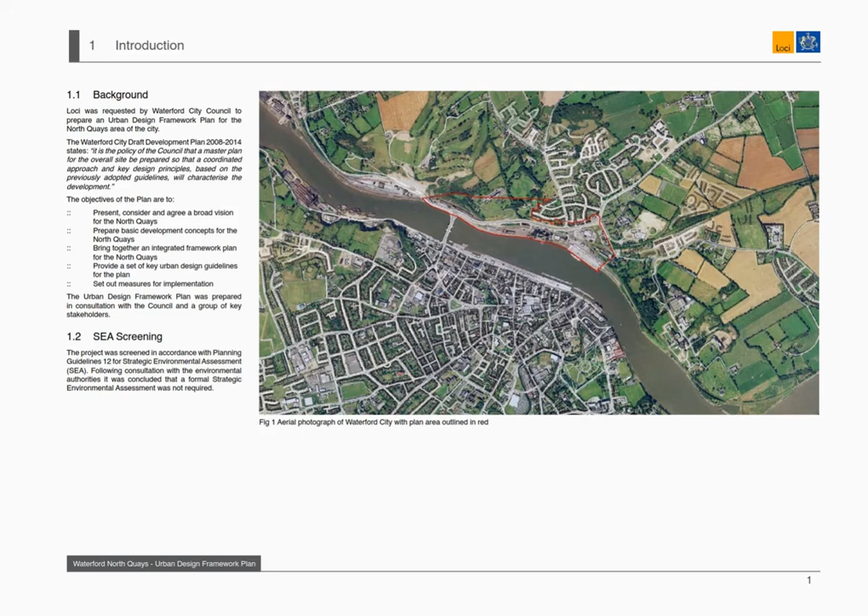1.2 Strategic Environmental Assessment, SEA, Screening. The project was screened in accordance with planning guidelines for Strategic Environmental Assessment. Following consultation with the environmental authorities, it was concluded that a formal Strategic Environmental Assessment was not required.

2. Vision and Principles. 2.1 Vision. The vision for the area is to create a sustainable, modern, and innovative extension of the city centre with the opportunity to connect the city centre with Ferrybank, where a rich quality of life and unique sense of place can be experienced by residents, workers and visitors alike.

2.2 Principles. 1. To create a strong and complementary extension of the city centre. 2. To provide a rich and diverse mix of uses with no single dominant function, where a balance of living, working, retail and recreation can be achieved. 3. To create a distinctive quarter of real character and sense of place and to provide an adaptable and coherent urban form and structure.

4. To strengthen the character and identity of Ferrybank and to improve its connectivity to North Quays and city centre. 5. To foster attachment to place, through quality and richness of experience. 6. To create a framework of public and civic spaces of character and visual quality. 7. To create a waterfront that is a focus for complementary land and water-based activities and recreation. 8. To provide for sustainable patterns of movement and access with priority for pedestrians, cyclists and public transport. 9. To minimize the environmental footprint of the North Quays.

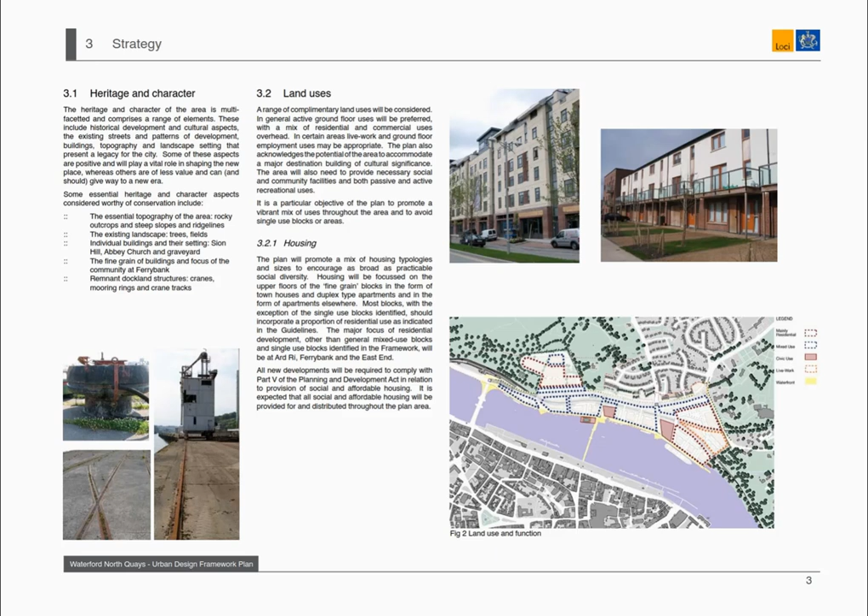All new developments will be required to comply with Part 5 of the Planning and Development Act in relation to provision of social and affordable housing. It is expected that all social and affordable housing will be provided for and distributed throughout the plan area.

3.2.2 Employment. Local employment provides the basis for healthy and sustainable communities. The development of the North Quays will provide for significant local employment opportunities, initially in construction activities, but more importantly in local services, retail, office-based, and a range of local businesses.

Live work and small unit employment uses will be focused on Ferrybank's East End. Significant office-based employment is provided for, within the robust mix of the area. The central location, and access to public transport and city centre services and attractions, provides a strong incentive for these types of uses.

3.2.3 Community support. Community facilities will be provided as a planning gain, and through development contribution schemes. Core elements of the framework strategy for community support will be the provision of a major cultural venue, childcare facilities in accordance with the requirements of the childcare facilities guidelines for planning authorities.

It is envisaged that one significant childcare facility will be provided at Ard Ri, Ferrybank and at the East End, in support of the residential development there. The location and detail of these facilities will be agreed with the planning authority when preparing development proposals.

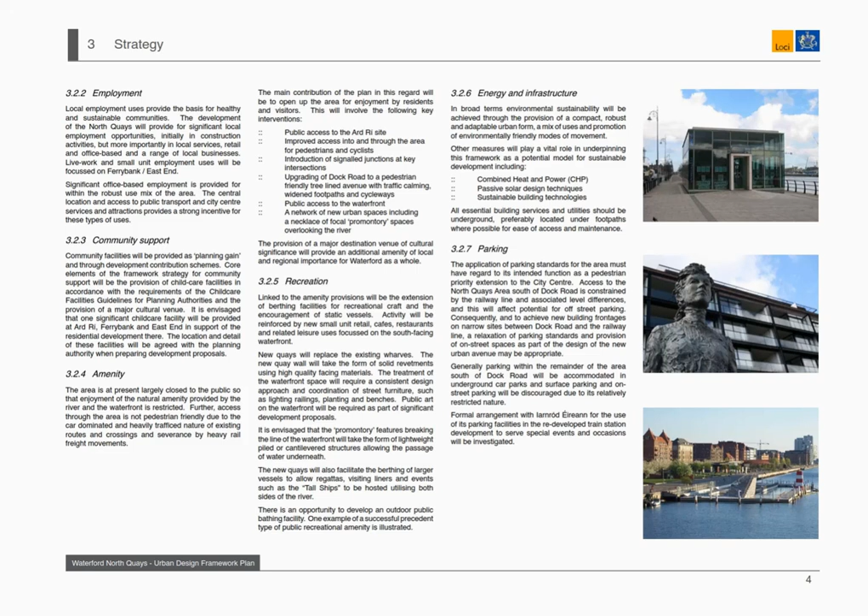3.3 Urban and block structure. The urban structure for the North Quays is informed by the local topography, landscape and the water body. The principal aspects of the urban structure are the connections to surrounding areas, such as the waterfront and streets connecting to Dock Road and beyond, and high levels of permeability within the area.

The Dock Road provides an opportunity for a new urban avenue and an important artery for the city. The North Quays will need to relate to this artery in terms of access, activities and urban form. The main access points from the Dock Road to the area will provide a high degree of physical and visual accessibility for residents, workers and visitors.

The connections between Ferrybank and the new waterfront will be prioritized. The waterfront will be a major route providing access to the quayside and the water and connecting with future strategic and amenity walks following the course of the river.

The expansion of the city centre to the North Quays will be achieved through the construction of the new cycle and pedestrian-only bridge spanning the river. This bridge will enable the expansion of the main street and space structure of the city centre by providing new connections to the North Quays, Ferrybank and the larger environs.

The structure will provide for new linkages to public transport. The railway station will be incorporated into the urban structure, significantly improving local access and larger accessibility. The size, shape and nature of the area dictates that a robust block structure is necessary. This structure provides a range and diversity of robust block types and sizes and maximizes opportunities for access.

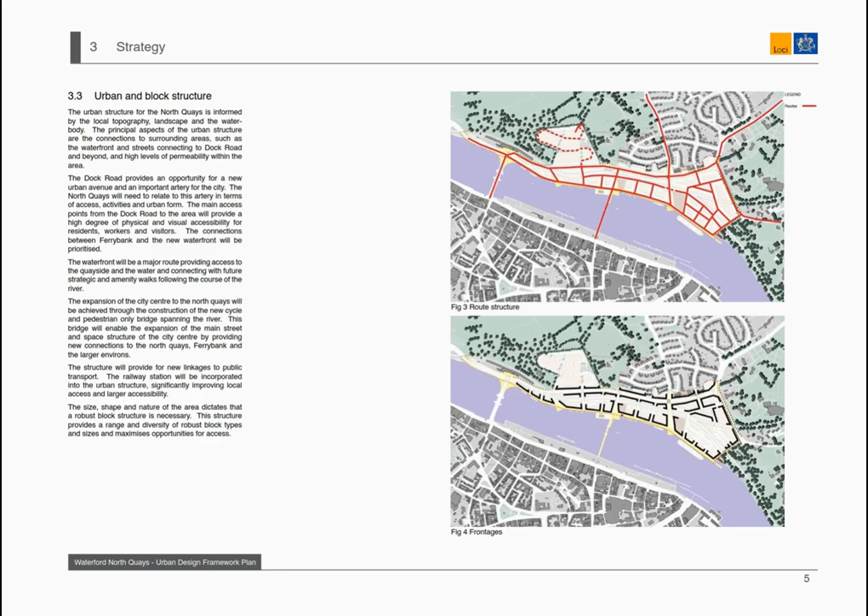3.4 Urban grain. The longer-term success of the area will be dependent on achieving a high degree of physical adaptability and diversity of use. The most important measure of adaptability is urban grain. A fine grain of development is recognized by best practice elsewhere as a key component in existing, successful areas, and is considered necessary to support a diversity of uses and physical typologies at different scales.

The plan provides for a permeable and connected network of streets and spaces that gives rise to a range of block sizes and types. The perimeter block is the preferred and tested building typology, and it is highly appropriate to the North Quays. The perimeter block distinguishes between public and private spaces, allowing public space to be actively fronted and passively policed, while also allowing flexibility in architectural and design solutions.

In restricted areas such as at Ard Ri, the steeply sloping topography will have a particular influence on both the urban structure and the design and layout of constituent blocks.

Development of this site will need to be carefully considered to avoid ambiguity between the fronts and backs of buildings and access constraints, while acknowledging the potential for views and sun aspect afforded by stepping down the site. To provide for a fine grain of development in key areas, the plan requires the subdivision of certain blocks into smaller parcels comprising different buildings of broad typology with different design approaches.

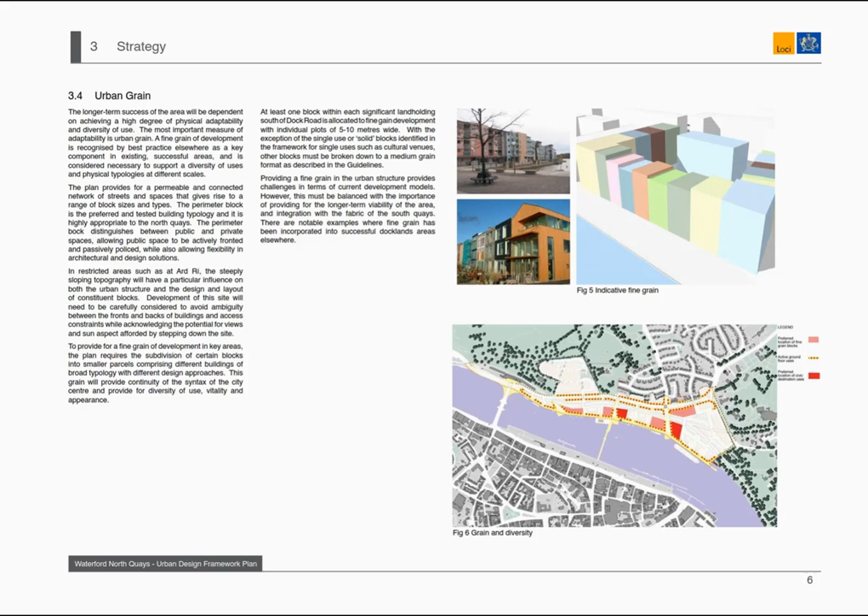3.5 Urban Space and Landscape. The plan provides for the linking of the existing civic spaces of the city and a new sequence and variety of spaces. The new spaces are in essence a necklace of spaces and promontories connected by the waterfront, ferrybank and surrounding areas. The significant urban spaces are:

1. The train station forecourt and promontory. 2. The train station underpass and promontory. 3. The bridge landing and promontory. 4. The main civic space and promontory connecting ferrybank and the waterfront. 5. The eastern beacon and connection to the riverfront.

The plan envisages the development of the urban village at Ferrybank, and this will require a careful consideration of its public domain and urban space. There is an opportunity to provide a vantage point or promontory park overlooking the city from the landscaped ridge at and above the Ard Ri site.

Connections to the wider landscape structure, in particular Ferrybank and its backdrop of ridges and the riverfront landscape, is an important feature of the plan. The new landscape structure acknowledges the potential and importance of the landscape outside of the plan area in visual and amenity terms. The relationship and interface between the frontage, ground floor uses, the waterfront and water-based activities, will be crucial to the function and success of these spaces.

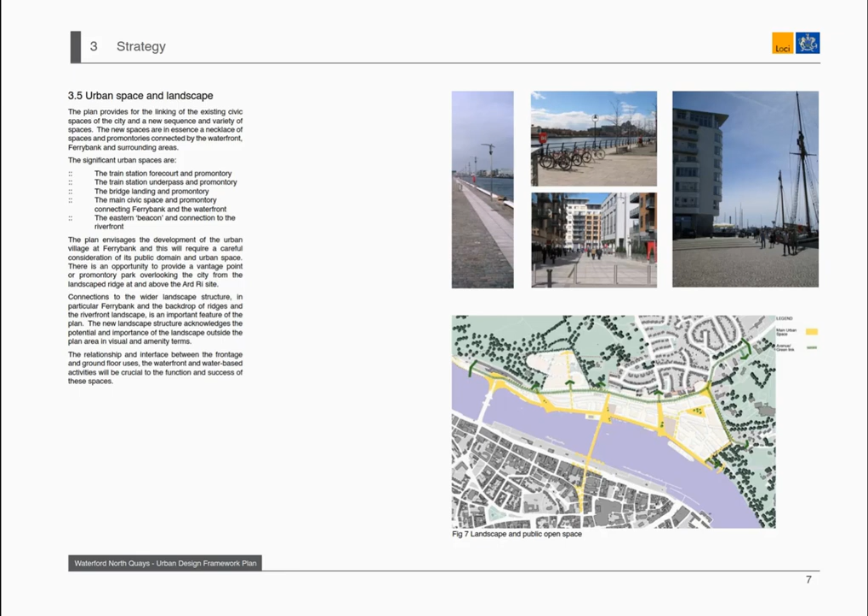3.6 Movement and Access. The movement framework provides for a balance in the available and potential modes of transport. At the strategic level, the plan takes advantage of existing and planned public transport and road and street infrastructure. Direct connections to the train station will be provided.

The street structure will allow direct access to planned, quality bus services on Dock Road. The new bridge will provide easy access to the existing bus station. The framework prioritizes pedestrian movement and access, and integrates local and strategic cycle routes.

The waterfront and several streets will be pedestrian priority or pedestrian only in nature. The bridge will provide a vital link between the pedestrian and cycle networks of the north and south sides of the river. Additional pedestrian bridges from Dock Road to the North Quays over the railway line will be provided.

Options for general vehicular access to the North Quays are limited. Excessive road engineering and grade separation solutions will not be acceptable. Limited road bridge access is currently available from Dock Road. This will need to be improved and upgraded to serve future development.

The substandard level crossing at Ferrybank will not be adequate to serve development, and a new road bridge will be required at or near this location.

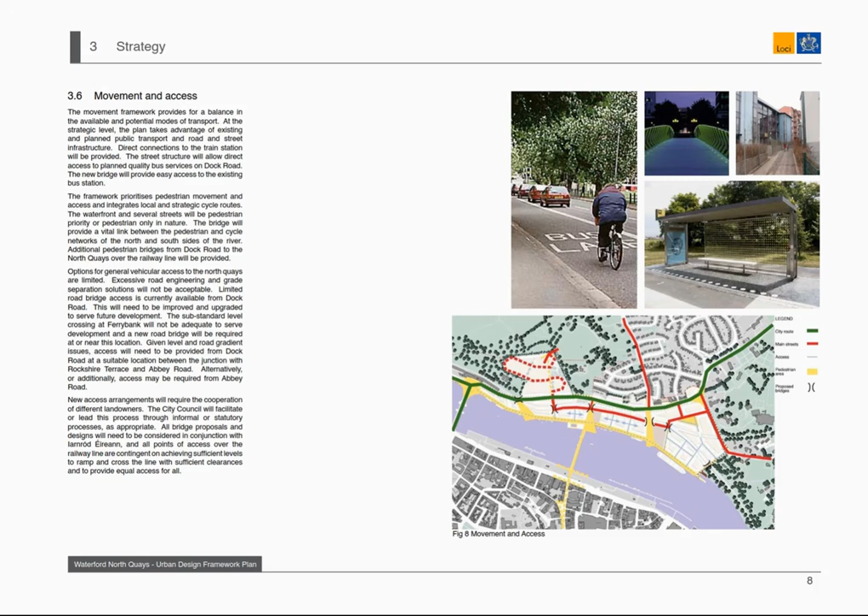3.7 Water and Recreation. The waterfront, the activities on the waterfront, and the water itself, will provide a new amenity for the city. Recreation and water-based activity will depend on easy and comfortable access to these new facilities and the relationship with frontage uses. The principal element will be the provision of a comfortable public waterfront area of the highest quality, with the addition of significant new promontories.

With the addition of significant new promontories, additional facilities such as pontoon access, marina moorings and static vessels will also be required. This plan outlines a recreation strategy.

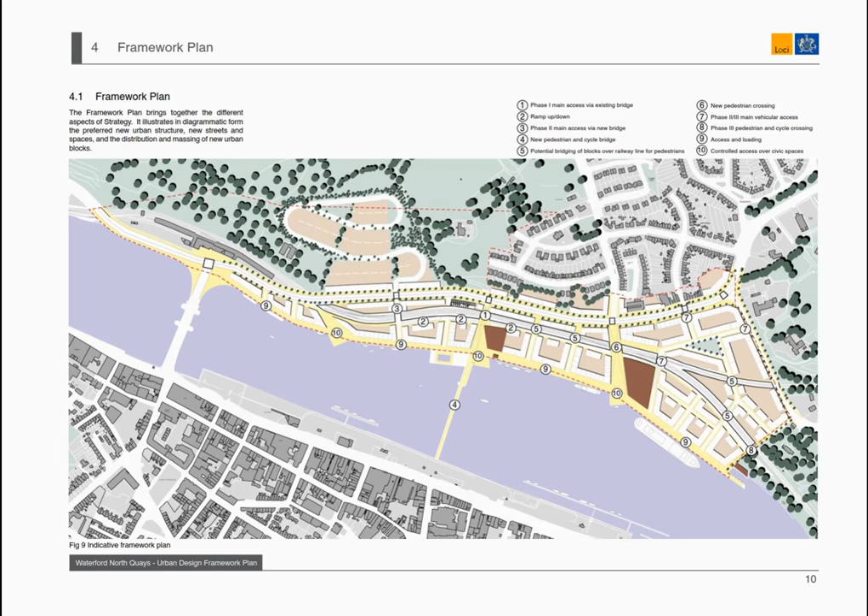4.1 Framework Plan. The framework plan brings together the different strategy aspects needed. It illustrates in diagrammatic form the preferred new urban structure, new streets and spaces, and the distribution and architectural massing of new urban blocks.

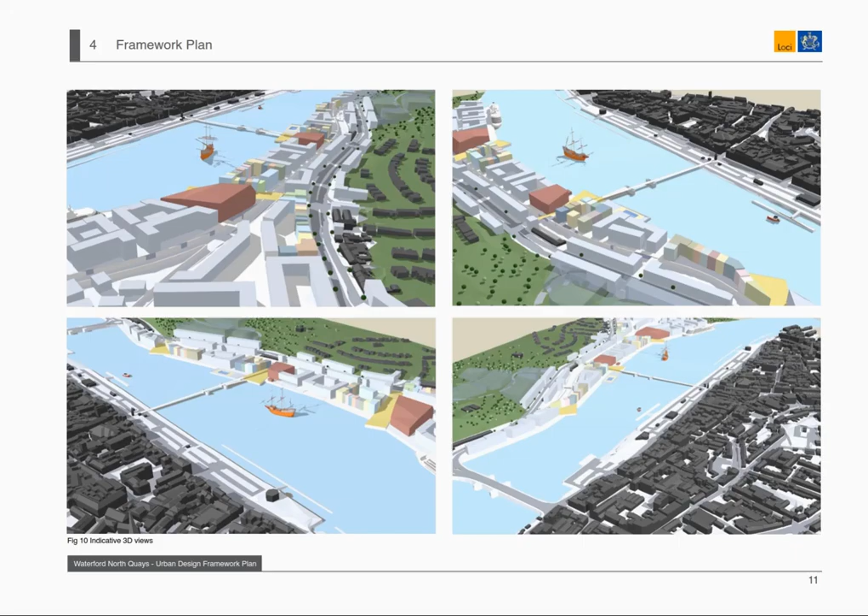4.2 Character Areas. It is recognized that certain sub-areas within the overall framework have an existing character that derives from their location, heritage, and character elements. It is intended that the future development of these areas will build on and respect their existing positive character aspects. These character areas are described below.

4.2.1 The Ard Rí / Sion Hill House. This sub-area is defined by its topography and landscape features. The sloping site divides naturally into lower, middle and upper portions. It is envisaged the lower portion fronting Dock Road will lend itself to mixed uses and commercial development.

Sion Hill House is a protected structure within a mature landscaped setting and attendant grounds. Any application for development of this site must be considered having regard to the provisions of the City Development Plan, and the Architectural Heritage Protection Guidelines for planning authorities.

The Ard Rí hotel site is presently dominated by the former hotel building, which is now vacant. The lower portion of this site fronting Dock Road is suited to general mixed retail, residential and commercial uses. The middle portion is suited to residential and small retail unit, or service units.

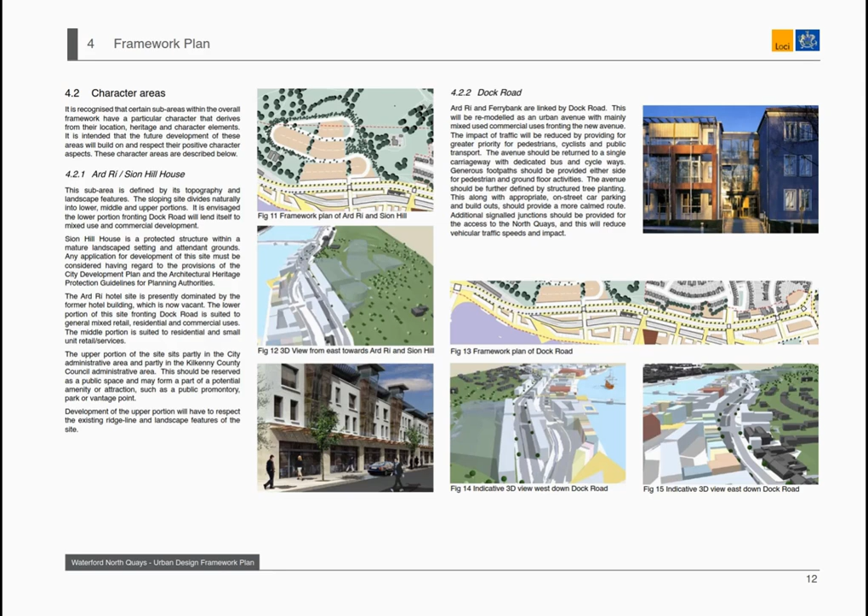4.2.3 Ferrybank. Ferrybank will be reinforced as an urban village. New focal space connecting with the waterfront will be provided, and a mix of uses and neighbourhood services will be provided to augment the existing services.

4.2.4 East End. Regeneration will extend southwards and towards the eastern end of the North Quays. This area, already used for small-scale employment, has the potential to consolidate this role through the introduction of mixed-use residential, with live-work and new employment uses.

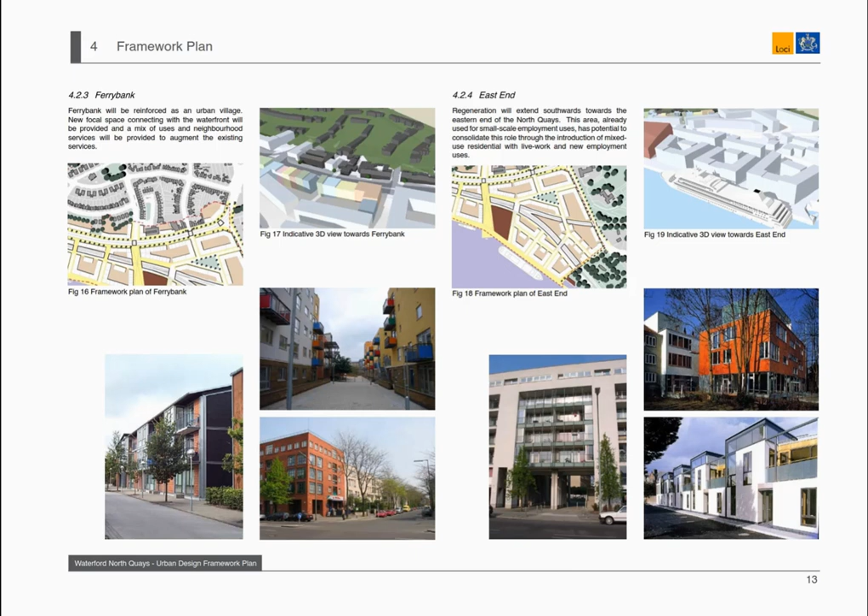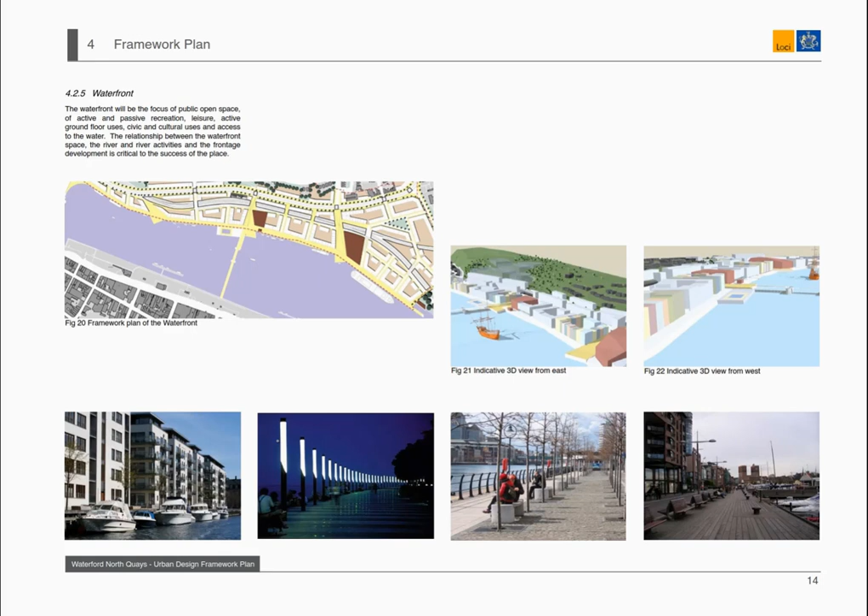4.2.5 Waterfront. The waterfront will be the focus of public open space of active and passive recreation, leisure, active ground floor uses, civic and cultural uses, and access to the water. The relationship between the waterfront space, the river and river activities, and the frontage development is critical to the success of the place. 5. Development Guidelines.

5.1 General Guidelines. 5.1.1 Diversity. Waterford South Quays present a fine grain of buildings, with a great degree of architectural diversity. This is derived from incremental development on narrow plots. The waterfront space and building line bring strong overall diversity and coherence to this frontage. This is an essential part of the expression of the city's character and the basic language of the waterfront.

While the development of the North Quays is likely to be carried out in a more comprehensive manner, it must not present single design solutions to all or significant parts of the frontage. The emphasis will not be on prescribing architectural style, but on achieving architectural diversity. This will be done in these ways.

1. Providing for a diversity of adaptable urban blocks. 2. Subdividing urban blocks into development plots. 3. Vertical subdivision of buildings. 4. Provision of ground floor entrances.

5.1.2 Blocks and plots. The location of the block types reflects the uses and functions for the area. Larger ownership patterns were considered when allocating block types to address spread and feasibility. Each significant landowner will be required to provide an element of fine-grained development as part of the overall development of their lands. Three block types are designated.

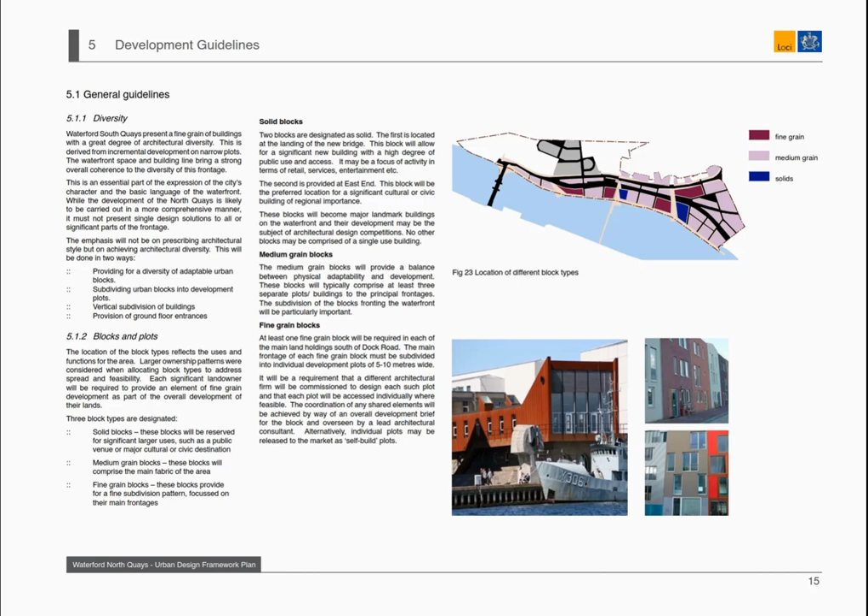Alternatively, individual plots may be released to the market as self-build plots.

5.1.3 Density and Intensity. It is recognized that a balanced approach to density across the area is reasonable to facilitate the equitable spread of development amongst the various stakeholders. The plan favors an emphasis on intensity of development rather than on density per se. Development proposals will be assessed with reference to maximum plot ratios. The calculation of plot ratio divides the gross floor area of buildings above ground by the site area. Plot ratio allows flexibility in the massing and distribution of floor space across the sites and the plan area.

The maximum plot ratio will be 2.5 to 1. This will produce a density of development commensurate with dockland developments in other major cities. This will be subject to meeting the appropriate access arrangements, appropriate scale and use relationships with existing adjoining and nearby development.

Figures in excess of this, but not exceeding a plot ratio of 3 to 1, will be considered only in exceptional circumstances, where a clear and proportionate betterment, such as a civic facility or other community, cultural or destination facility, is provided as part of a development, on a part of a site or elsewhere in the plan area. This provision will require detailed consultation and consideration by the City Council. The Council will require property and development evaluations in support of this increase in plot ratio.

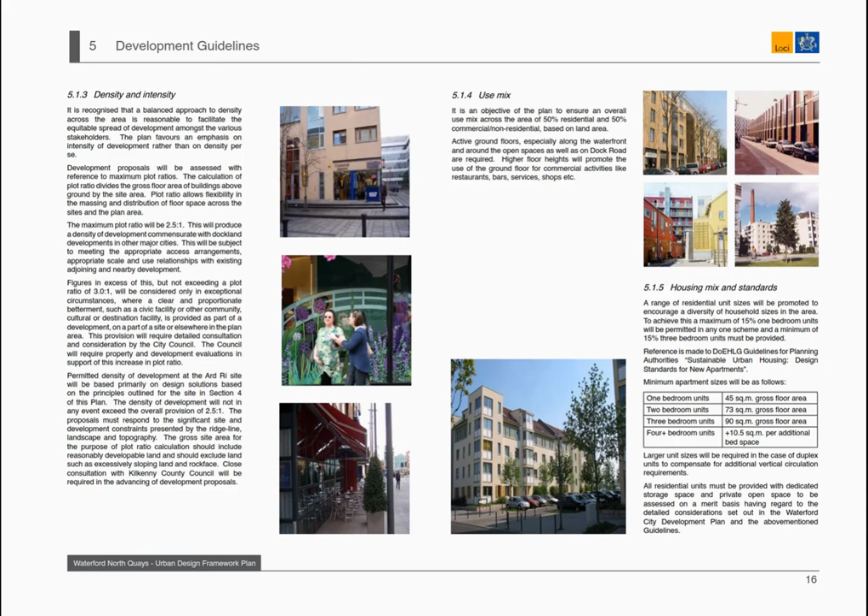Larger unit sizes will be required to compensate for additional vertical circulation requirements, like duplex units. All residential units must be provided with dedicated storage space and private open space to be assessed on a merit basis, having regard to the detailed considerations set out in the Waterford City Development Plan, and the above-mentioned guidelines. 5 Development Guidelines.

5.1.6 Building height. The context height of the area is influenced by the following parameters: respecting existing scale and typologies of the city, and achieving sustainable densities of development.

Maintaining a human scale to streets, spaces and the waterfront, providing appropriate levels, continuity and enclosure. Reflecting local constraints, such as protected structures and existing development, emphasizing place and location. Emphasizing significant use or function, and maintaining quality private and semi-private open spaces within the block.

Microclimatic considerations. Indicative building scale is shown on the indicative sections below. This scale of development is considered appropriate to meet the above parameters. Increases in height will be considered for the solid/landmark blocks, where a significant use is proposed or included in development.

Height variation will be encouraged through diversity of building usage and type, within appropriate relationships. For this reason, building height will be considered with reference to an appropriate range of stories rather than preset building heights. Corner buildings or corner elements of buildings should meet the maximum story height to provide definition for the blocks.

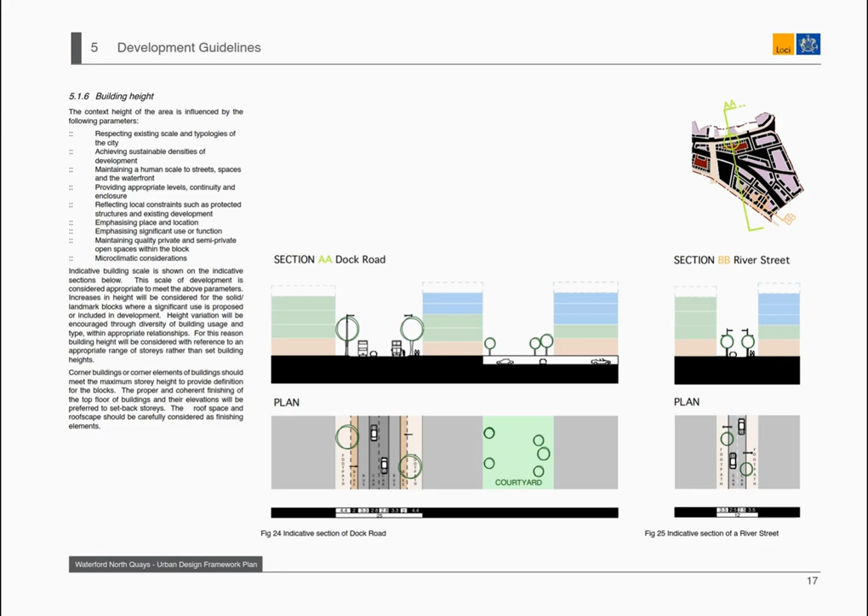5.1.7 Streets and bridges. Existing and upgraded streets and avenues. The two existing streets, Dock Road and Abbey Road, will need to be upgraded to provide appropriate function, access and scale for the North Quays.

It is proposed that Dock Road will be remodeled as an urban avenue. This will entail the reconfiguration of the carriageway, junctions and footpath. The new avenue will need to provide for active uses at ground floor level, comfortable footpaths, dedicated cycleways, bus lanes, plus a two-way undivided carriageway for general traffic.

Uses on the avenue will be mixed and will support and reflect existing uses, for example, at Ferrybank Village. The scale of development on both sides shall be sufficient to provide adequate continuity and enclosure. A maximum height-to-width ratio of approximately 1:1 would be appropriate.

Abbey Road will function as a smaller scale, urban avenue with a lesser movement and access function. It will need to provide for comfortable footpaths, with cycle lanes and undivided carriageway. Again, the scale of development on both sides shall be adequate to provide appropriate continuity and enclosure. A maximum height-to-width ratio of approximately 1:1 would be appropriate.

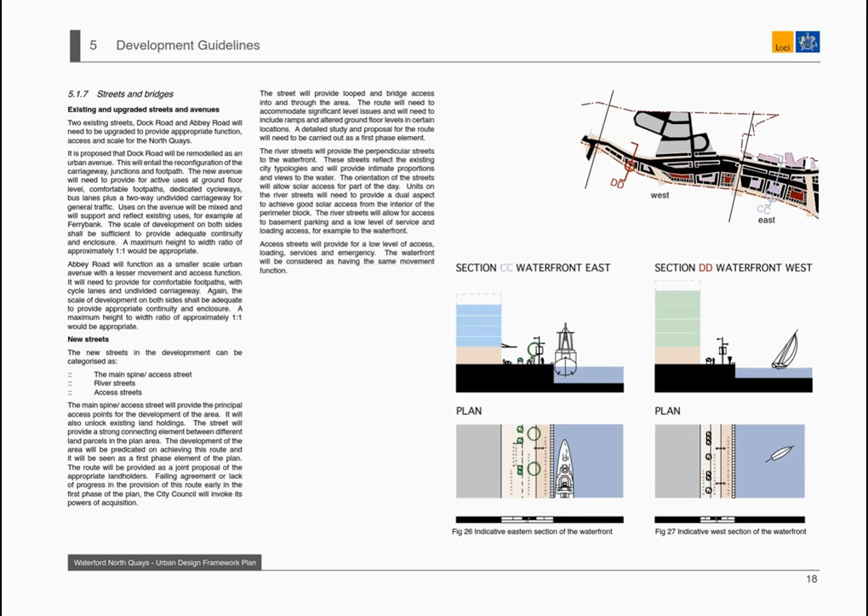Access streets will provide for a low level of loading, services and emergency access. The waterfront will be considered as having the same traffic movement function. 5. Development Guidelines.

5.1.8 Key Spaces. The main urban spaces will form the visual and functional focal points for the area. It is important that these spaces are carefully shaped and designed to provide physical adaptability, and a high quality, durable and consistent approach to materials of construction and finish.

Strong relationships between the surrounding buildings, particularly the ground floors and the use of the spaces. Continuous surfaces where possible by carefully grading and sloping to match building ground floors. Detailed design proposals will be required for the bridge landing public space, which will need to provide for the bridge landing and connections from there to Dock Road.

The bridge may be elevated above the public space to provide direct connections from the South Quays to the Dock Road. In this case, the handling of access from the bridge to the space will be crucial. The public space will need to prioritize waterfront connectivity, and the ground floor of the space will need to be active.

The new pedestrian civic space, connecting Ferrybank and the waterfront, spanning the railway line, will be a wide-spanning structure, graded smoothly from Ferrybank over the railway line and down to the quays to provide a comfortable and attractive area, and a setting for the major destination building. The design and detail of this structure will require detailed consideration.

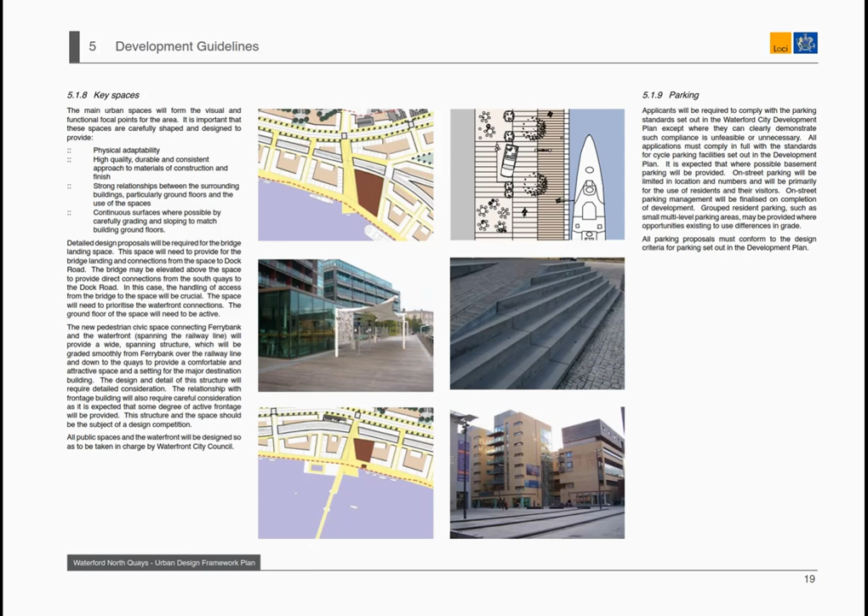Grouped resident parking, such as small multi-level parking areas, may be provided where opportunities exist to use such differences in grade. All parking proposals must conform to the design criteria for parking set out in the development plan. 5. Development Guidelines.

5.1.10 Sustainable Development. Sustainability criteria should be considered at macro and micro levels. Further, sustainable objectives should not only seek to satisfy environmental criteria, but also ensure that social and economic objectives are achieved. At a macro level, proposed development should seek to:

1. Utilize land efficiently through appropriate densities. 2. Ensure an adequate mix of uses provided locally in order to reduce the need to travel, and 3. Maximize access to sustainable modes of transport including cycling and public transport. By establishing the required critical mass, it is possible to support local services and amenities within walking distance of homes.

At the site planning level, sustainable urban form should ensure that an appropriate microclimate is established between buildings. Equally, sustainable urban forms should ensure that buildings receive adequate levels of light, ventilation and passive solar energy, whilst minimizing heat loss and exposure. At this scale, proposals should also investigate the feasibility of:

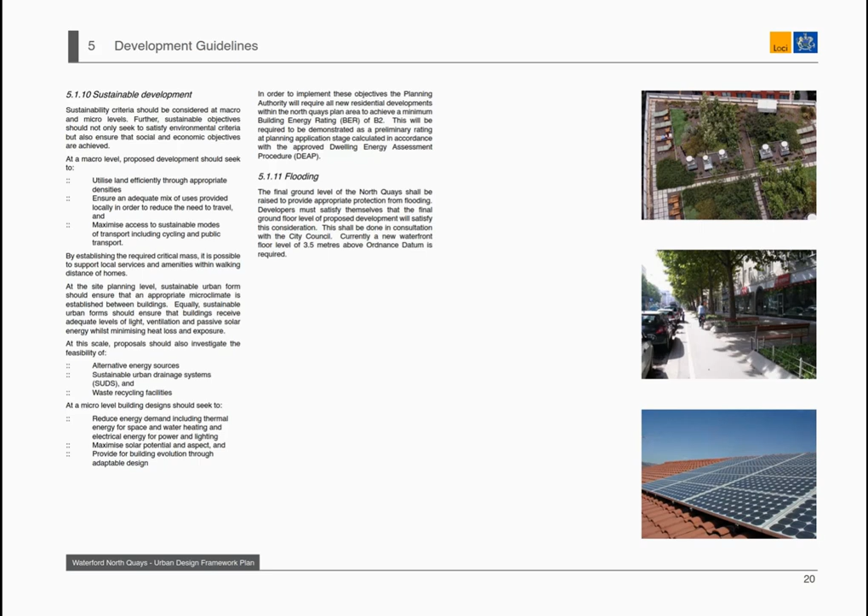5.2 Projects. The following key projects are identified as having the potential to provide the catalyst for development. It is an objective of the plan to actively promote the development of the projects and/or to favorably consider any development proposals that may secure their provision as planning gain, subject to the planning authority being satisfied that such proposals will be consistent with the proper planning and sustainable development of the North Quays in general, and with the relevant provisions of the plan in particular.

5.2.1 Bridge. The proposed pedestrian bridge will be a key enabler of development, not only opening up the area for development and associated footfall, but potentially serving as an icon for the area and the city. The design of the bridge will be a crucial factor in the success of the area, and overcoming access constraints arising from level differences.

There is an opportunity for the bridge to simultaneously connect the South Quays with the North Quays while also providing a link to Dock Road. This will provide some design challenges in terms of providing such equal access from the bridge in a practical yet elegant engineering design solution, and accordingly, it is recommended that this element will be subject of an international design competition. This, in turn, will require a detailed design brief to be prepared.

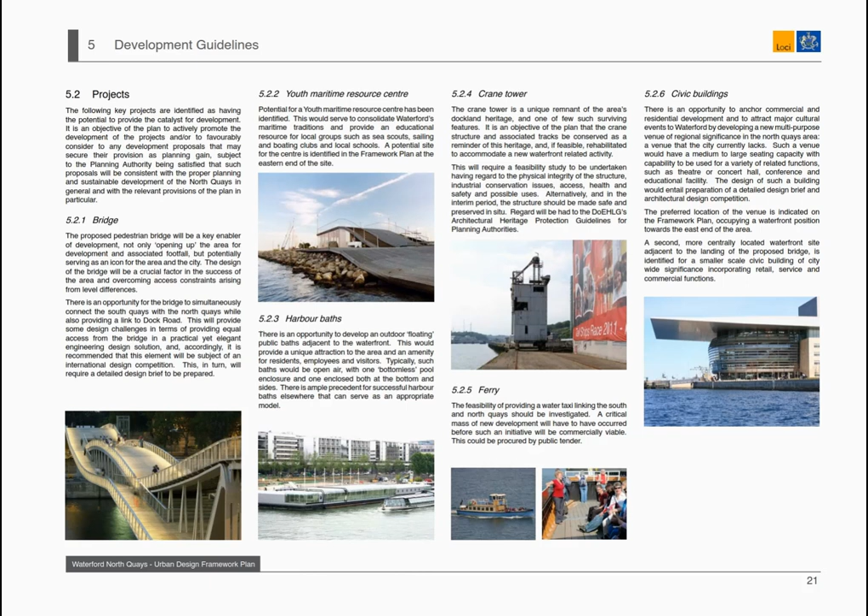6. Implementation. 6.1. Developing the vision. The framework plan outlines a vision for the North Quays area, and a physical framework for achieving that vision. The framework will thereby inform both the preparation and assessment of detailed planning applications, and will have statutory effect as a local area plan within the meaning of the Planning and Development Act.

6.2. Coordination and delivery. It is imperative to avoid an ad hoc approach to development, that will prejudice the proper planning and sustainable development of the North Quays. This will require a coordinated approach to delivery. It is recommended that formal delivery arrangements be put in place to guide and monitor the implementation of the plan and to provide strategic direction as follows.

1. Establish a representative multi-sector steering group with appropriate structures for implementation and monitoring. 2. Devise a detailed implementation program that will set out necessary coordination measures, priorities, responsibilities and phasing.

6.3. Funding. Public infrastructure such as the new public spaces, bridge and supporting utilities will be of direct benefit to, and facilitate, the development of the area. The nature, extent and coordination of infrastructural provision will need to be established as a priority.

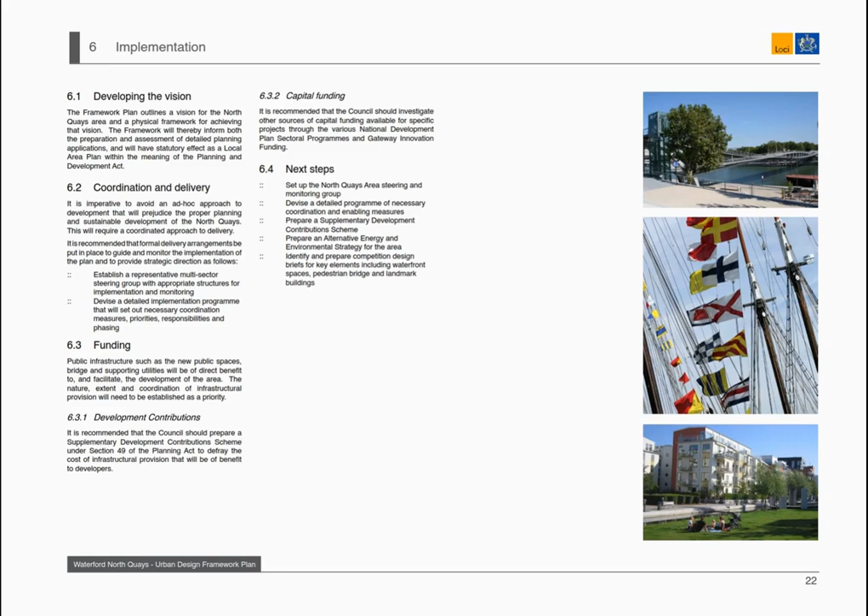6.4. Next steps. 1. Set up the North Quays Area Steering and Monitoring Group. 2. Devise a detailed program of necessary coordination and enabling measures. 3. Prepare a supplementary development contributions scheme. 4. Prepare an alternative energy and environmental strategy for the area. 5. Identify and prepare competition design briefs for key elements including waterfront spaces, pedestrian bridge and landmark buildings.

Appendix 1, Planning Context. The North Quays represent a major opportunity for the city and the region.

The outstanding potential of the area has been identified in a number of previous plans, guidelines, a significant vision statement, and a design competition.

National Plans and Strategy. Waterford was designated as a gateway centre in the National Spatial Strategy 2002, NSS. Gateways should drive the development of their wider regions, including surrounding towns, villages and rural areas, to achieve sustainable and more balanced regional development across the country. If balanced regional development is to work, the spatial structure must be supported by policies aimed at enhancing the attractiveness of such areas for people.

The NSS mentions, as an example, opportunities for consolidating Waterford City around the River Suir, with particular emphasis on the potential for developing the North Quays.

The National Development Plan 2007 to 2013, NDP, focuses investment according to the NSS. The National Development Plan identifies the renewal and development of the North Quays, along with infrastructure and transport improvements, as one of the key investment priorities for Waterford.

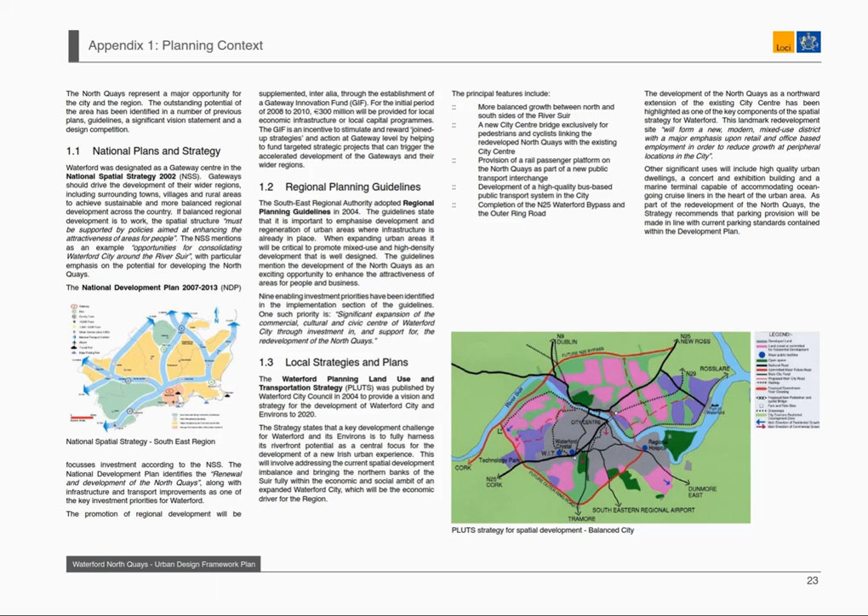Other significant uses will include high-quality urban dwellings, a concert and exhibition building and a marine terminal capable of accommodating ocean-going cruise liners in the heart of the urban area. As part of the redevelopment of the North Quays, the strategy recommends that parking provision will be made in line with current parking standards contained within the development plan.

Appendix 1, Planning Context. The Waterford City Draft Development Plan 2008 to 2014 sets out policies and objectives for the social, economic, cultural and environmental development of the city. It incorporates the principal components of the Planning Land Use and Transportation Strategy, PLUTS. In the Draft Development Plan, the North Quays area is zoned as mixed-use opportunity sites, and is described as follows.

The term mixed use is used to describe development that includes an appropriate mix of different facilities. These might include shops, bars, restaurants, cafes, residential units, hotels, cinemas, leisure facilities as well as offices and certain types of low-impact industrial or enterprise activities. Mixed-use development can help create vitality and diversity, reduce the need to travel and can be more sustainable than development consisting of a single use.

Mixed-use development, especially when residential use is included, can produce a general feeling of safety.

The key to reducing antisocial behavior is to achieve greater pedestrian activity, especially by increasing the use of areas in the evening, and by avoiding the creation of dead street frontages.

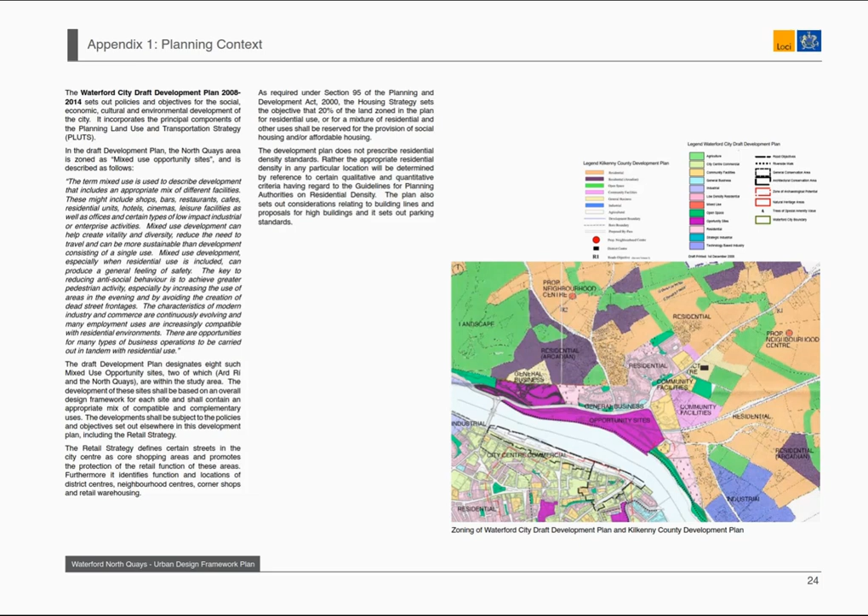The plan also sets out considerations relating to building lines and proposals for high buildings, and it also sets out parking standards. In October 1998, the Architectural Service of the Office of Public Works, OPW, prepared a development vision for the North Quays.

It outlined the following objectives: 1. To integrate the framework plan into its immediate context. 2. To achieve a coherent image for the North Quays. 3. To ensure the economic and social survival of the North Quays development as an area-based centre.

4. To promote mutual interdependence between activities on both sides of the river. 5. To create a pedestrian walk, linking a series of open spaces through the site. 6. To establish nodal projects at intervals along the quays. 7. To maintain the existing scales of the North Quays and surrounding landscape. 8. To promote a mix of uses on the site.

In summary, the vision for the development proposed the following elements: commuter ferry, spine road, pedestrian walk, hotel and marina, venue building, mixed-use development, cruise liner docking station and public spaces.

In 2002, the OPW organized an international architectural and urban design competition for the North Quay sites. The winning entry proposed buildings oriented perpendicular to the riverfront, in parallel lines. The proposed buildings were variable in height, with smaller buildings facing the riverfront and taller buildings to the rear. The proposal included a public square located strategically where the river bends, to expose long-distance views.

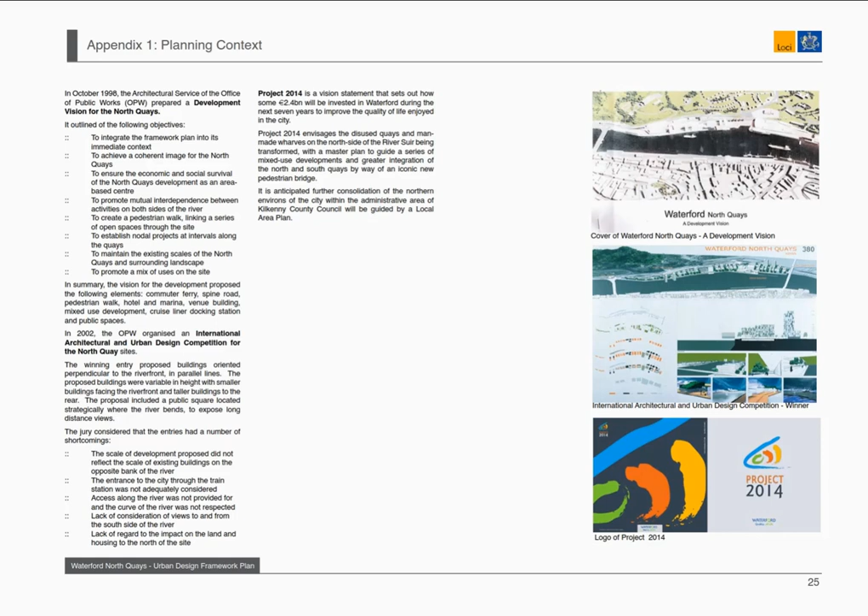It is anticipated that further consolidation of the northern environs of the city, within the administrative area of Kilkenny County Council, will be guided by a local area plan.

Appendix 2, Urban Analysis. 2.1 The North Quays Area. The area comprises approximately 28.5 hectares, strategically located on the north bank of the River Suir, and includes the docks, which stretch from Rice Bridge to the Abbey Church.

The area also includes Plunket Railway Station, part of the site of the former Ard Ri Hotel, which extends into the administrative area of Kilkenny County Council, the established development fronting onto the dual carriageway at Ferrybank, and the Bus Éireann Garage.

The length of waterfront, distance between Rice Bridge and Abbey Church, extends about 1 kilometre. The distance between the riverfront and the railway line varies between 40 and 105 metres. Appendix 2.2, Urban Analysis.

2.2.1 Character. The site has become underused and derelict due to the relocation of port activities downstream. The most significant character element of the area derives from its location, opposite the historic city centre of Waterford, with the fine grain of its unique waterfront.

However, the docks are separated from the existing neighbourhood at Ferrybank by railway tracks and a dual carriageway. The impression of character of the North Quays is consequently of significant obsolete industrial buildings, large open concrete surfaces and minor surviving light industrial uses.

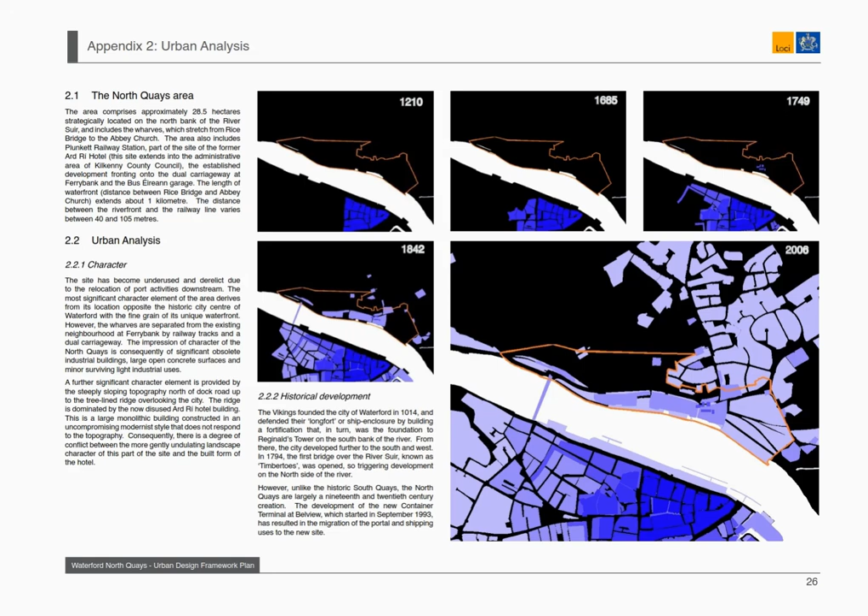In 1794, the first bridge over the River Suir, known as Timbertoes, was opened, triggering development on the north side of the river. However, unlike the historic South Quays, the North Quays are largely a 19th and 20th century creation. The development of the new container terminal at Belview, which started in September 1993, has resulted in the migration of the port and shipping uses to the new site.

Appendix 2.2.3 Natural and built heritage. The quays are an assemblage of man-made wharves, which are incomplete and intermittent. They consist mainly of open spaces in which unused buildings and structures of significant scale such as lifting cranes, temporary storage sheds, large mill buildings and silos sit as reminders of Waterford's industrial and maritime history. The buildings present an imposing though incomplete frontage to the river.

There are 8 protected structures in the study area. 1. RPS 507 Dock Road, number 14. 2. RPS 709 Dock Road, Plunket Railway Station. 3. RPS 529 North Quay, access to Ferry Point. 4. RPS 103 Ferrybank, Abbey Church of Ireland. 5. RPS 104 Ferrybank, Abbey House. 6. RPS 105 Ferrybank, Lodge to Abbey, Church. 7. RPS 106 Ferrybank, Sacred Heart Church. 8. RPS 107 Ferrybank, Sion Hill House.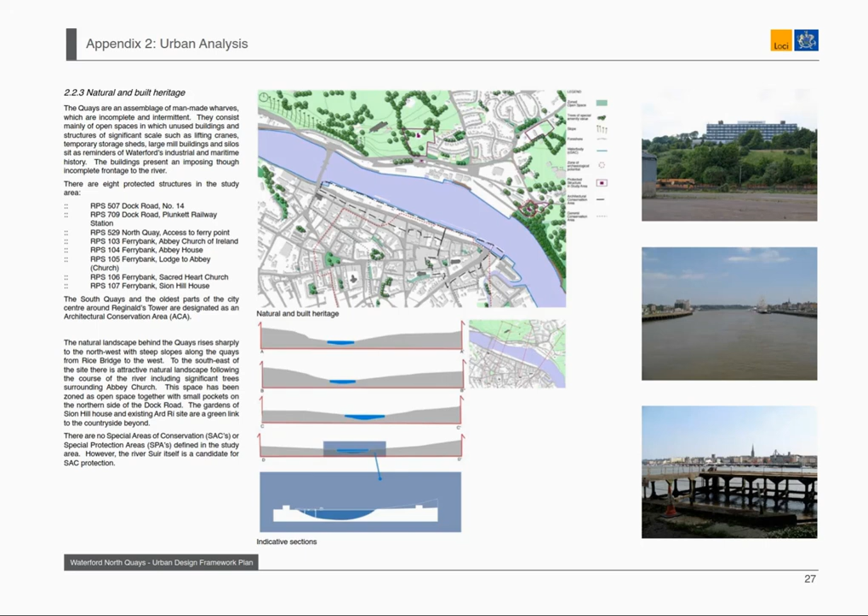To the southeast of the site there is an attractive natural landscape following the course of the river, including significant trees surrounding Abbey Church. This space has been zoned as open space together with small pockets on the northern side of the Dock Road. The gardens of Sion Hill House and existing Ard Ri site are a green link to the countryside beyond. There are no special areas of conservation, SACs, or special protection areas, SPAs, defined in the study area. However, the River Suir itself is a candidate for SAC protection.

Appendix 2.2.4 Microclimate. Waterford is one of the sunniest, mildest and driest parts of Ireland but is typical of the rest of the country in that it is protected from the more extreme temperatures that affect continental countries of the same latitude. The average minimum temperature in midwinter is 4 degrees Celsius. In July average temperatures vary between 12 degrees Celsius and 18 degrees Celsius. Much of the area enjoys good solar aspect due to its topography and the width of the river.

As opposed to the mean annual rainfall for the wetter parts of the country of up to 2,800 mm, Waterford is less than half at around 1,000 mm. The prevailing wind direction in Waterford City is from the southwest, however the wind can be funneled along the river valley from any source, affecting temperatures on the waterfront.

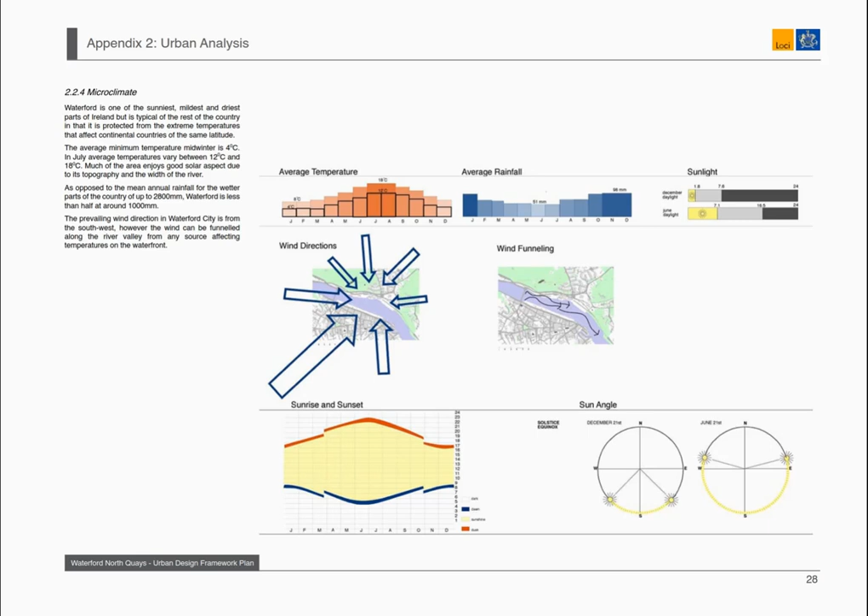Appendix 2.2.5 Urban Form and Visual Analysis. The area is physically and visually contained between the water body and the hill to the north. The railway tracks separate the dockland area from the residential area of Ferrybank to the north.

The South Quays and adjoining streets in the city centre have closed frontages and create a string of focal spaces at regular intervals. In contrast, the north side has no focal points and the frontages along both the streets and wharves are inconsistent. 3 axial views were identified from the south side to the north.

1. Parnell Street/the Mall, past Reginald's Tower to Abbey Church. 2. Broad Street/Barronstrand to Sion Hill House punctuated by the clock tower on the waterfront.

It is believed that the entrance to Sion Hill House was intentionally placed on this axis by its original merchant owners. Bridge Street over Rice Bridge.

Glimpses of the river and views across to the North Quays can be experienced intermittently as one walks parallel to the river along O'Connell Street, High Street, and Bailey's New Street. The Ard Ri Hotel dominates the western end of the skyline, in competition with the deserted silos, warehouses, and receding line of low-density suburbia.

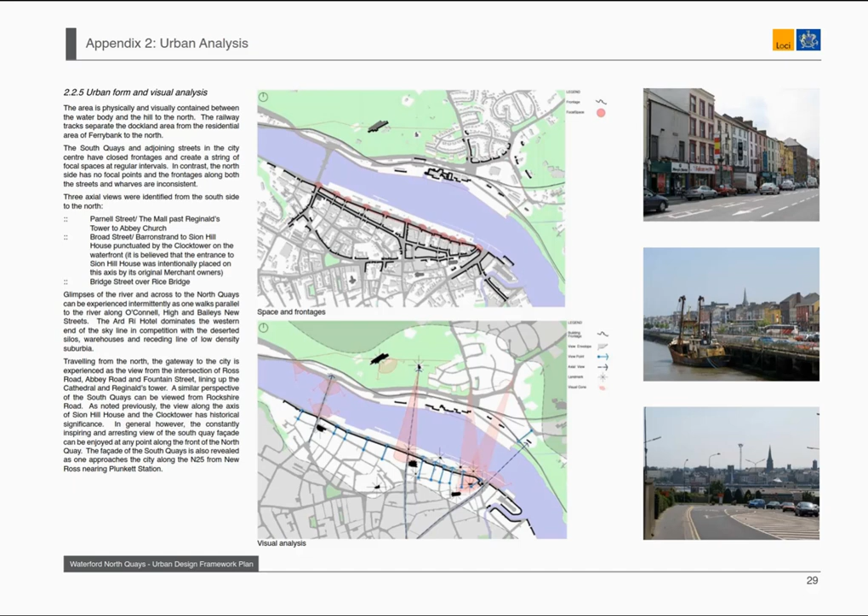The facade of the South Quays is also revealed as one approaches the city along the N25 coming in from New Ross when nearing Plunkett Station.

Appendix 2, Urban Analysis. A tissue study of the existing South Quays was carried out. The tissue study highlights the dimension of historic quayside blocks, the fine grain of plot subdivision within each block, and variety in building size and height.

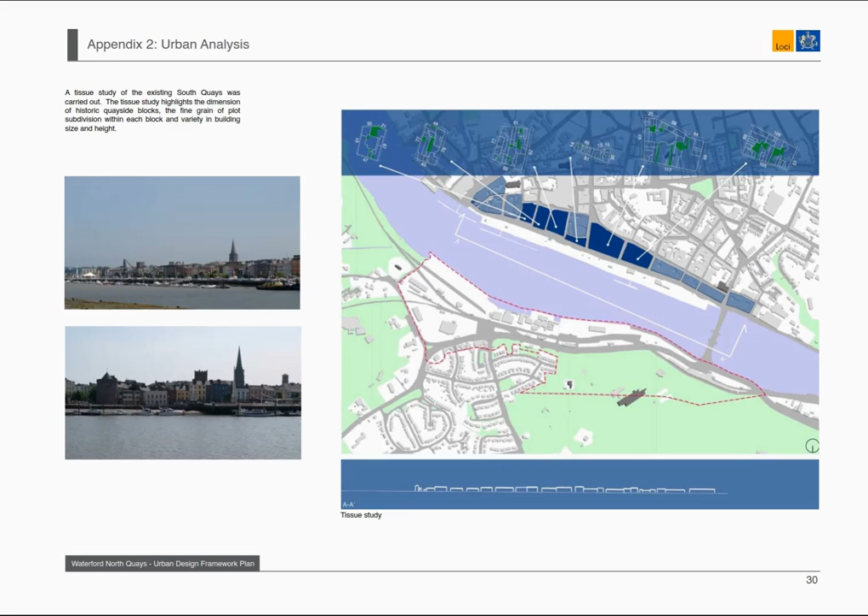2.2.6 Land use and activities. Industrial activity on the waterfront of Waterford has moved on, leaving the shells of dock-related buildings vacant and obsolete. Some light industry remains in the northeastern portion of the site area, including the Bus Eireann depot and small-scale automotive commercial uses. The existing retail is minimal and caters to the local market.

Ferrybank urban village extends up and over the hill to the north with acres of semi-detached and other housing. This area is bordered by educational uses to the east and mixed uses further south. The southeast end of the docks is marked by significant trees and forms an attractive foreground to the Abbey Church.

Above the site to the west there are the well-maintained and extensive grounds of Sion Hill House, which neighbours the even more expansive landscaped and increasingly steep bluff, from which the Ard Ri Hotel dominates views to and from the city. Below the cliff and at the far west end of the site lies the existing railway station.

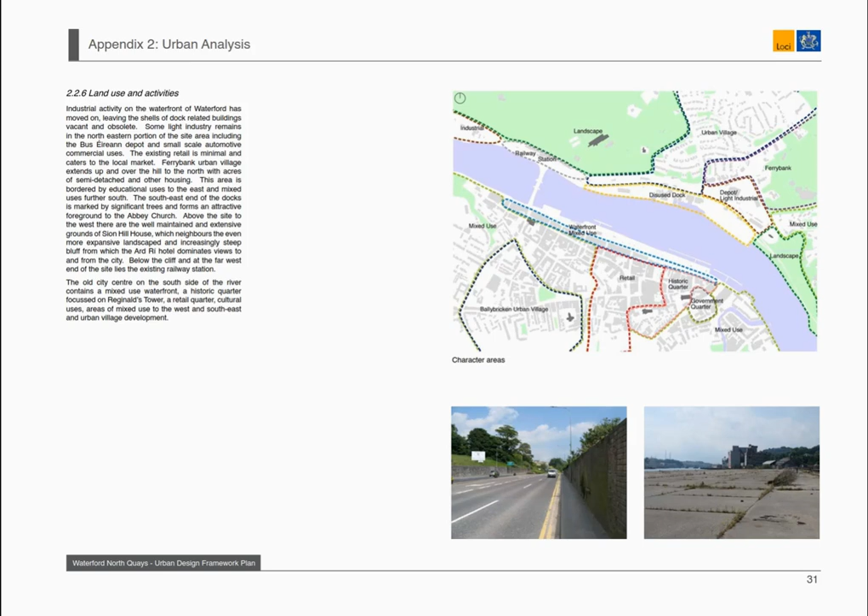The old city centre on the south side of the river contains a mixed-use waterfront, a historic quarter focused on Reginald's Tower, a retail quarter, cultural uses, areas of mixed use to the west and southeast, and an urban village development. Appendix 2.2.7, Movement and access.

The area can be reached using public transport, either by rail or bus. The train station is situated at the north end of Rice Bridge and to the west of the North Quays. The bus terminal is close to Rice Bridge on the south side. Within the city there are 6 different bus routes, but only one serves Ferrybank and the North Quays. The proposed green route will provide a high-quality bus service along Dock Road, connecting the suburbs and the city centre.

Accessibility of both rail and bus services is severely restricted by the fact that the river is crossed by one bridge only. There are significant local barriers to pedestrian movement, such as large inaccessible sites and lack of routes generally. The waterfront is not accessible to the general public. There are no established general access points from the North Quays and Ferrybank. Informal points of access have been established in a number of locations.

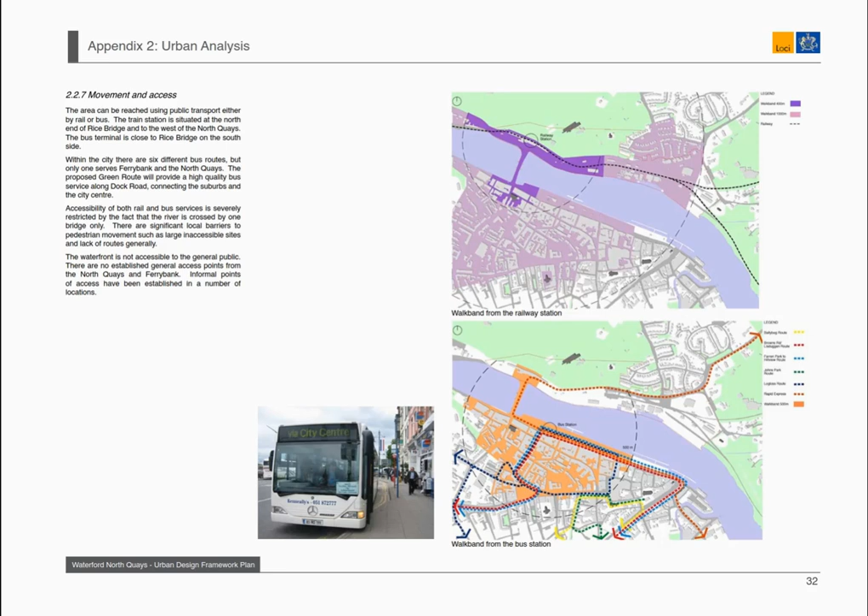By road, Waterford is connected to Dublin (N9) and Clonmel (N24); these approach the city from the northwest at the train station. New Ross (N25) approaches the city from the northeast through Ferrybank, and Cork (N25) comes in from the southwest into the city centre.

There is a ring road planned and under construction to reduce through traffic in the city centre, as well as park and ride facilities at the edge of the city. Within the study area, Dock Road, N25, and Rice Bridge are both regularly congested. This should be reduced through adequate traffic calming measures when the ring road is completed.

While in the city centre some pedestrian areas and routes are already in place, a pedestrian waterfront in the north and a pedestrian bridge across the river are proposed in the city development plan. As there is only one bridge in Waterford at present, the river shore itself constitutes a barrier to north-to-south movement. The river also provides another direct access way to the city for recreational and fishing boats on the South Quays.

The railway lines inhibit movement into and out of the North Quays sites. There are only 2 existing access points from Dock Road across the railway to the site at present: a level crossing, and an old restricted vehicular bridge.